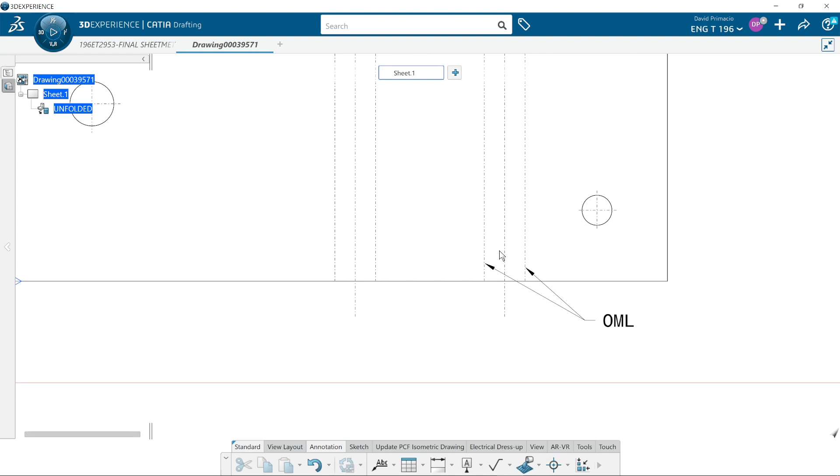Alright, how did you do putting on the text? In reality, we have to do a little bit more than identify the center line. We have to, first off, identify the outside mold lines to the center line, which were created automatically, and then we want to create the next OML.

So you go to leader and you click this edge here, and then click here position and you type in OML. You'll notice that I have two leaders on the other one. You do have to call off both. So I have to click on this, then right click on it. I tell you, I have the hardest time with this sometimes.

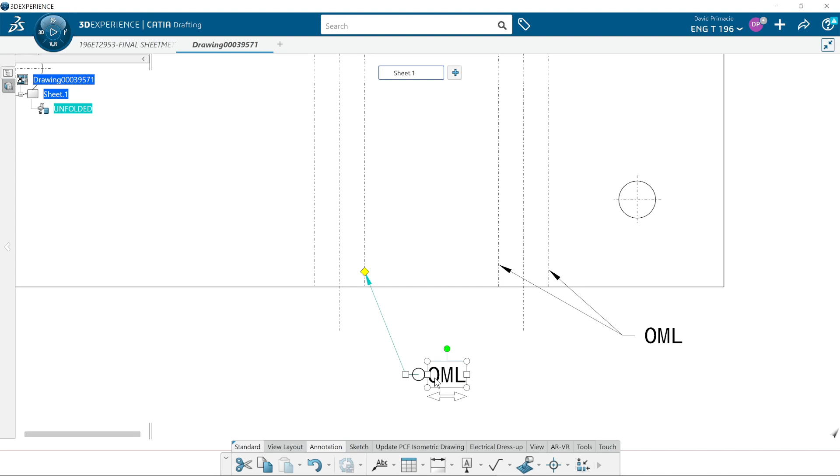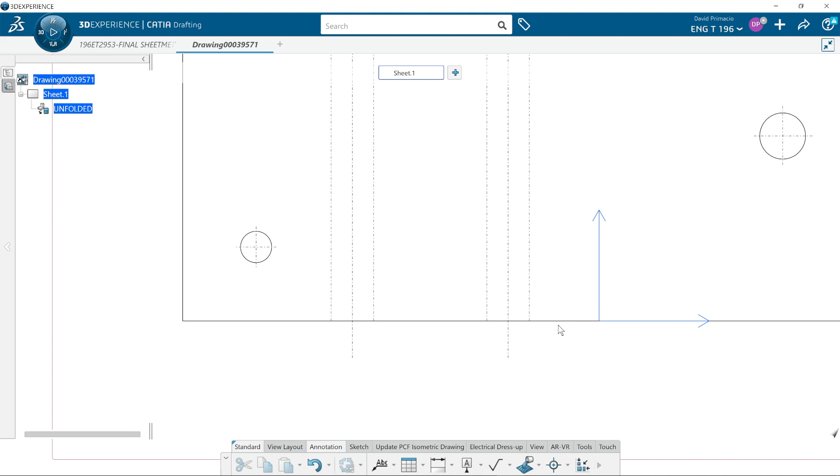Right click on the text, I think, and then add a leader. So right click on the text contextual menu and use the add leader, and then pick another spot on this line. So you have to call off the OMLs on both here and over here. You got to call off your OMLs. But that's all you have to do is add the OMLs. So there's 4 OML callouts.

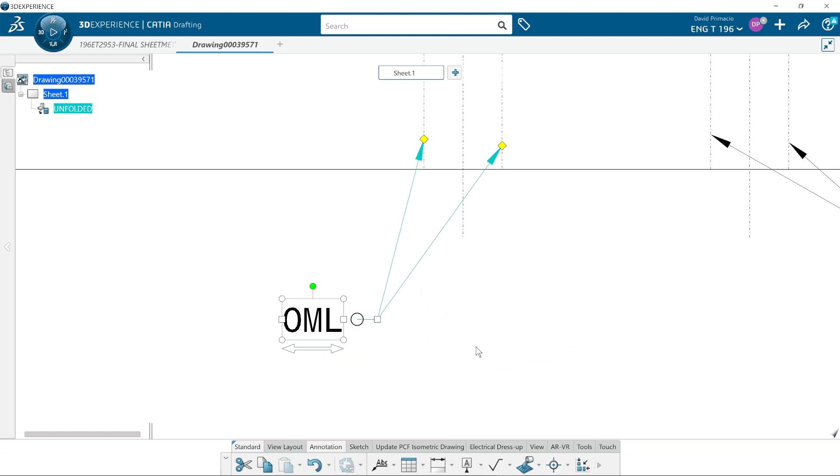One thing I do like about the newer system, it does seem to be better about moving this around like this. Okay, this is not really kosher. It's usually like this or like this. Okay, the idea is that when I zoom out, it looks pretty readable and it looks kind of uniform. It's got to be easy for the shop to read.

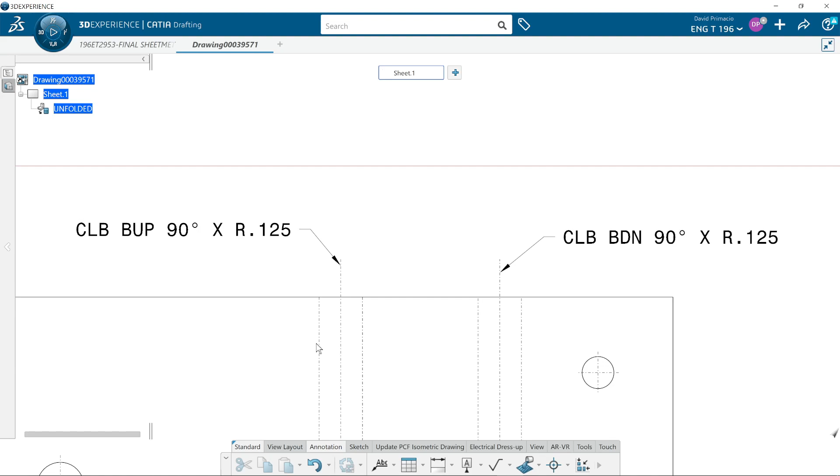Now, what I didn't tell you is, if you look in your print reading book, they show you the callouts on how to do the centerline bend up, or down in this case. I don't remember what the actual radius is for this exercise, but the CLB says centerline bend, and I'm telling this to bend up 90 degrees with whatever radius I have here. So if I come over here in the folded environment, this is going to come up here, and then we're bending it up, and then we're bending it down.

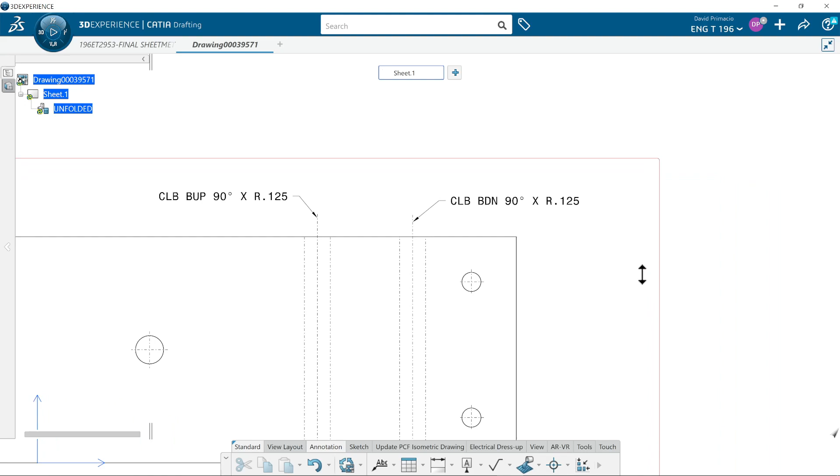Okay, so this first center line, I'm saying take this, bend it up 90 degrees with the 1/8 inch radius in here. By the way, the bigger the radius, the better. So if you could do a 1/4 inch, it's almost guaranteed not to snap on you. You start getting down to 1/8 and tighter, the thicker the material, the harder it is to get that to bend without cracking.

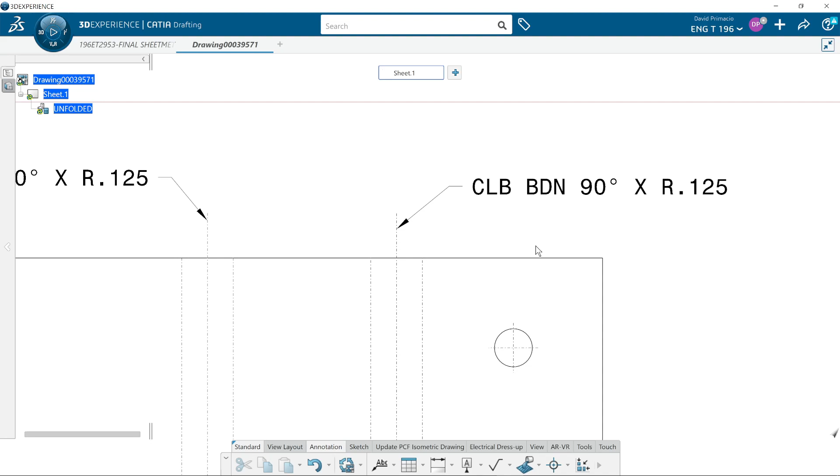All right, so I bent it up, and then I got to bend this flange down. Center line bend, BDN for bend down. The angle I want it to bend down times whatever the radius is. You must use these exact acronyms that they're using. There's programs that are run to do the work, and you must have the callout correct as it goes in to read the text on the machine to identify what it's supposed to do.

All right, based on this, see if you can create the other two views or the other callouts on the other side. And that is all you do. That's it for your drawing. That's the only view you need, except for maybe an ISO view.